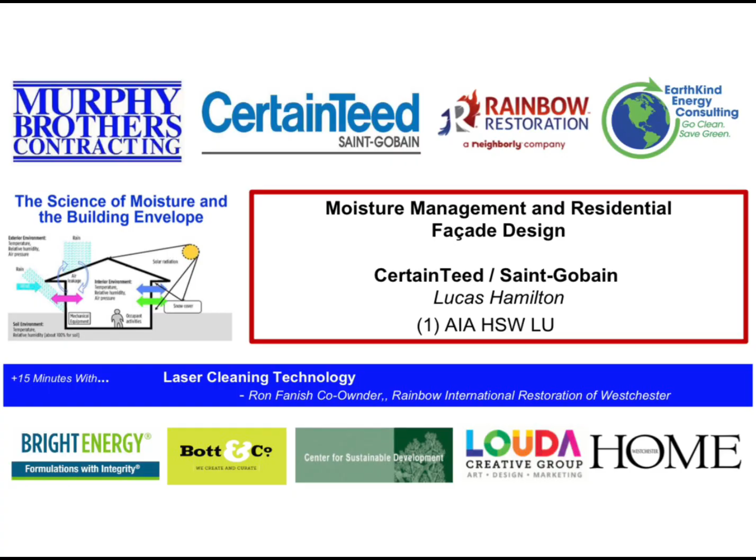Thank you, Michelle. Bringing up my presentation now. Okay, hopefully that all looks right and is in presentation mode. Doing good, great, then I'll go ahead and kick it off.

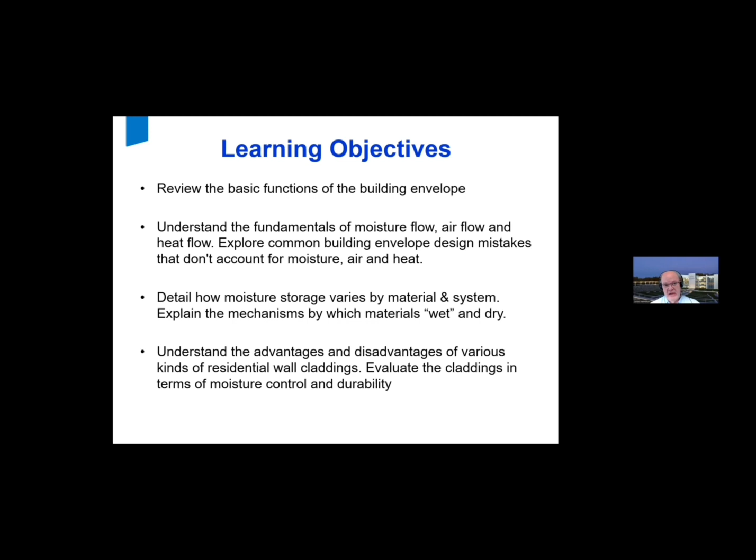So jumping right ahead, functions of the building envelope - I think you guys know this, right? It's structural; in most cases, the envelope is structural in residential construction. It is intended to protect us and be the envelope between the interior and the exterior, creating that interior environment in which people can thrive.

If energy was free, that would be really easy, right? Back when energy was cheap, we didn't have nearly as many problems. We also had like 3 or 4 layers to our walls, and now that energy is expensive, we've got like 6, 7, 8 layers to our walls, and we find ourselves in a durability pickle. So we're going to talk about how to get that durability back in, because that is one of the goals - it's a function of our envelope.

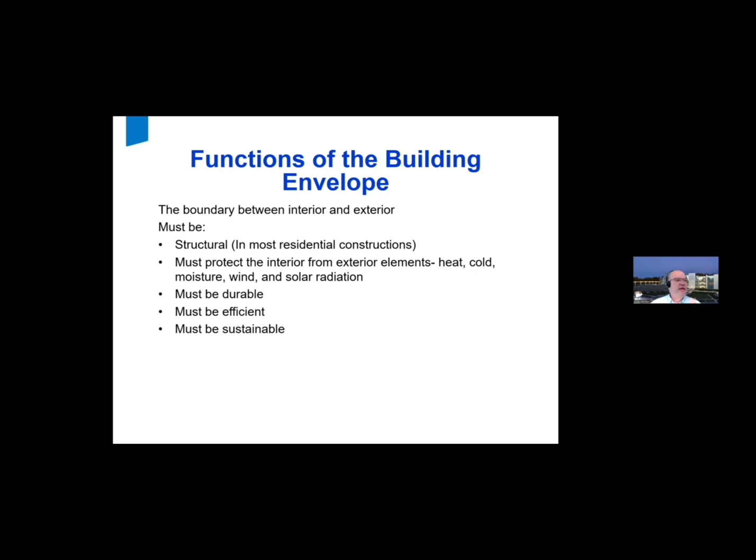Now the pressure is on us to be efficient and sustainable. We can do all of this at once. It is possible, all the tools and information are before us. But ironically, it takes going back and remembering the lessons of our forefathers, the giants on whose shoulders we stand with regards to building buildings. They did things that were really smart that we've gotten away from. We have to remember why they worked and bring that back into what we're doing.

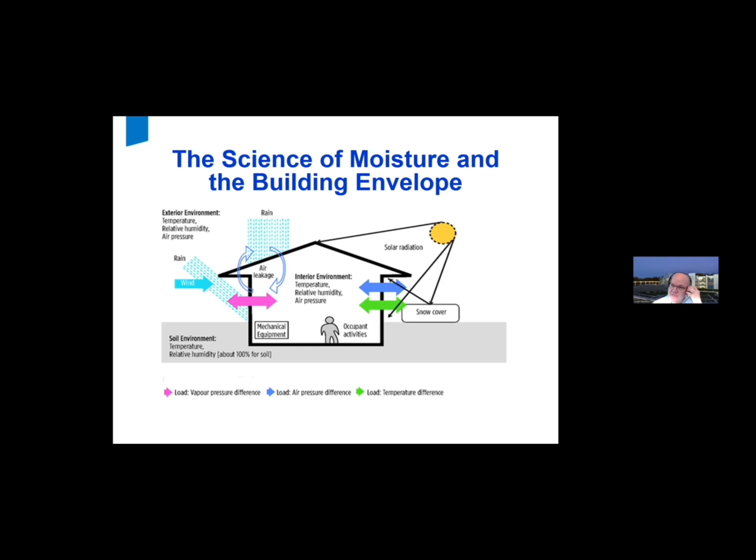So we've got water coming in and we're going to have to get it back out. We have to take advantage of the forces at our disposal to move that moisture, and essentially these are the forces that we do get. That little yellow orb in the top right corner is our friend, and we are going to try to use it along with the wind to our maximum advantage here, because the forces from nature don't have to necessarily be our enemy in this regard. They can actually be our friend and help us get back into a dry place.

For the most part, our weather, traditionally, has been influenced by the position of the jet stream and by ocean water temperatures. Those gave us the El Niños and La Niñas, and of course the actual jet stream was giving us your polar vortexes and the actual positioning of where the weather fronts were, when we had Canada's cold weather and when we got the Gulf of Mexico's wet weather. So that's what, for the most part, has been driving the weather across the United States.

And now we include global warming and the impacts we're currently measuring on everything from temperatures to rain depositions, individual storms. I guess you guys have all noticed that the 1,000-year storm tends to happen every year now. So we're quickly coming to realize that things like the plumbing code, and other things that we're basing our calculations on for how to handle moisture, might need to be either looked at, changed, or we immediately start putting in a bigger fudge factor or safety factor in our calculations to accommodate more rain coming in shorter periods of time.

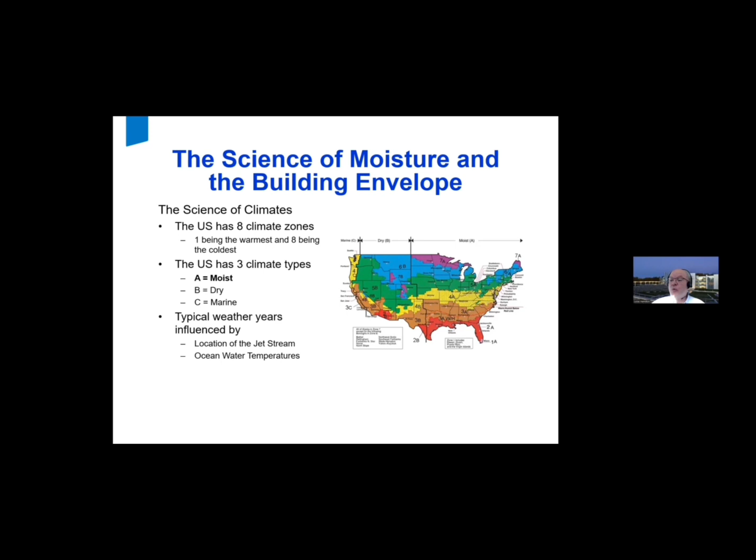And that's going to influence how we get the water off the building, which is all, of course, found in a plumbing code. And that is a really important goal: get the water off the building, because the longer the water sticks around in contact with the building, it's going to get in. It's going to get in. When water sticks to stuff, which it does, it finds its way in. We'll talk about how that occurs, but the trick is to get it off.

So, let's reset ourselves with the way we think about the weather and start to come to grips with the fact that some of these rainfalls are going to be a lot bigger than they have been in the past, and we're going to have to deal with that moisture.

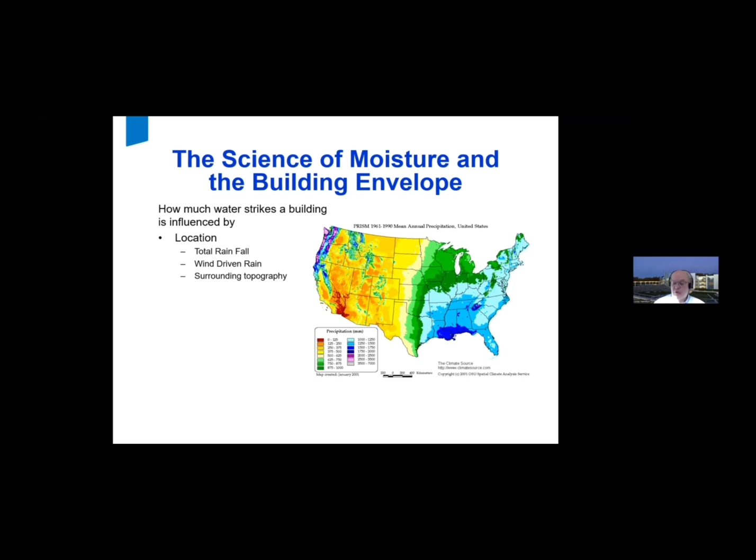Now, how much moisture gets deposited on your building, because the rain doesn't fall necessarily straight down. Usually there's a component of wind involved, so we have rain traveling at an angle, and the wind-driven rain deposits water on the side of the building as well as on the roof.

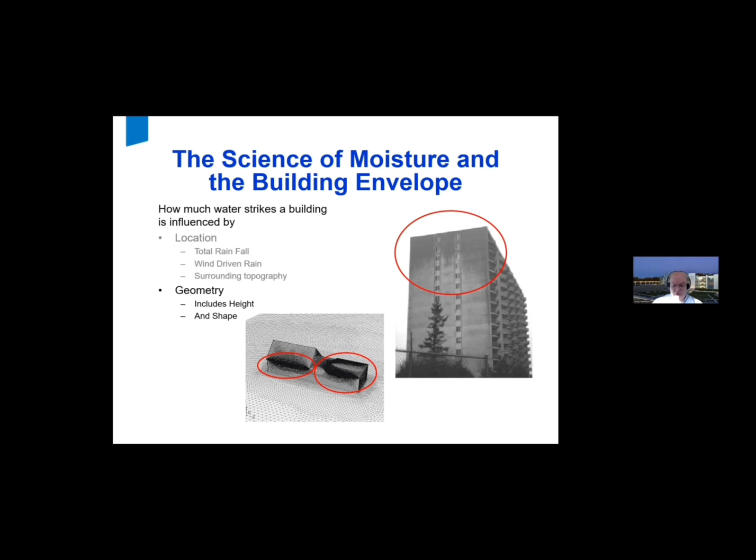Where are you getting rid of it? Again, the longer that moisture sticks around in contact with the building, the greater the chances it's going to get in.

By the way, you can find the wind-driven rain direction for any zip code in the United States from free weather generators available online. One of my favorite places to look for free tools is Oak Ridge National Laboratory's website, ornl.gov. At that site you'll find free weather rosette generators showing wind-driven rain, wind-driven snow, principal rain direction, any kind of weather you're looking for, for any zip code in America.

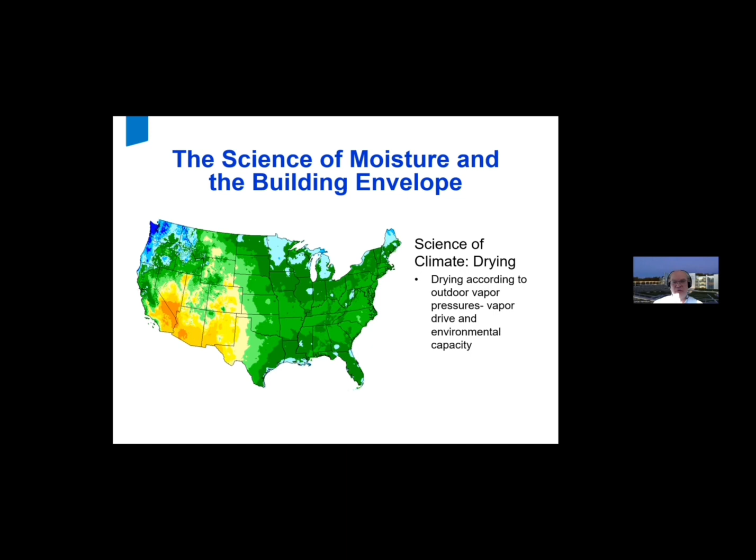We're going to talk a little bit about that coming up. Again, when we talk about the science of drying, we're talking about sun and energy from the sun. Here's a map of incident global solar radiation on the US. It is scary that parts of Western New York are as bad as the Pacific Northwest when it comes to the amount of energy you're going to get from the sun.

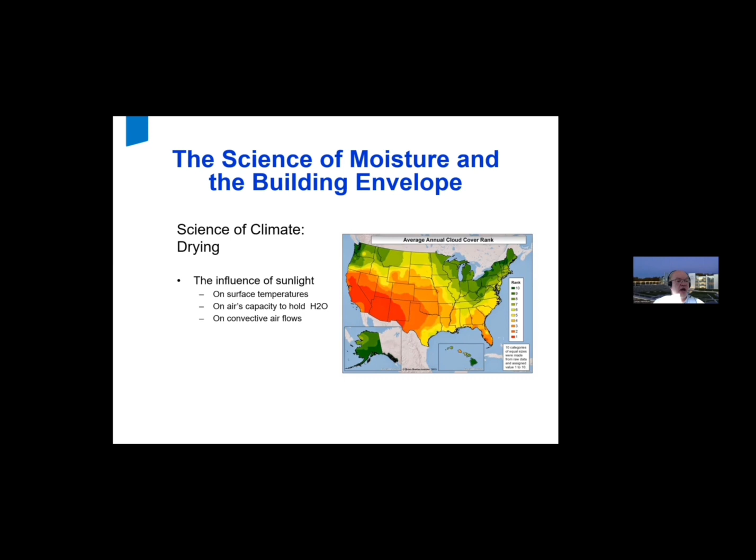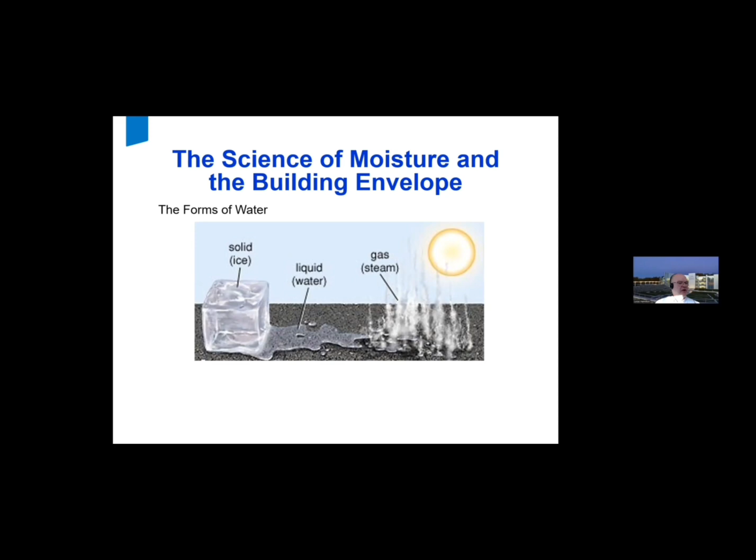Now, we're talking about trying to dry to the outside. So what we need is air that's below 100% RH. Clearly, if it's at 20% RH, it's got more capacity than 100% RH. Why is that? It's this whole concept of dew point that you've been lectured about since you were in design school—the idea that the air, as it warms up, can hold more moisture.

The dew point is the temperature at which, if the air cools off one more degree, it's going to have to give up its moisture. It can't hold any more. We're going the other way, going anti-dew point, bringing in lower humidity so we have a greater capacity to take this moisture with us. All we need is a few degrees difference and a little relative humidity difference, and we can take that moisture with us. The more, the better, the faster it's going to happen.

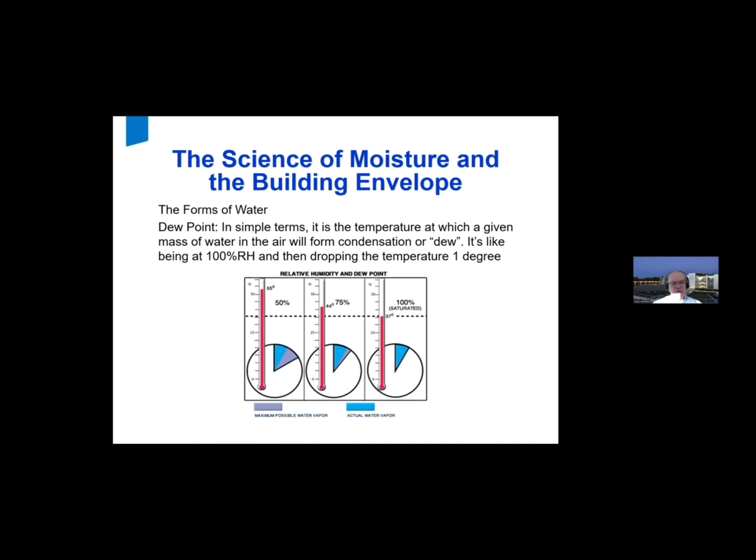But don't get turned off thinking that in Westchester, southeastern New York, Connecticut, New Jersey, or northeastern Pennsylvania that it doesn't work. It absolutely does work. It works in every single climate.

Now, the thing about water: water flows downhill, right? The Romans knew this, we know this. The problem is it's really sticky stuff. If it's in contact with something, it's going to want to flow into any crevice, any void, any capillary it can find to get back to that surface. It doesn't have to flow downhill when it gets to that crack — it can flow back a flat route, it can actually flow uphill, through surface tension and through airflow.

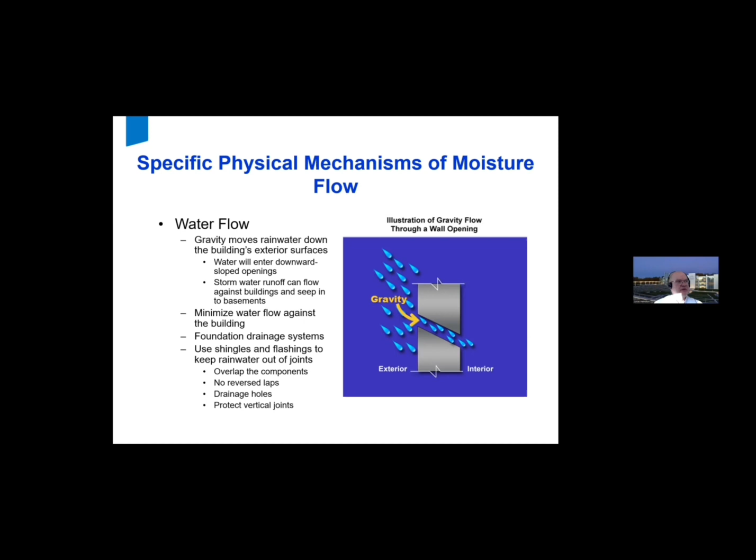You've all seen the water meniscus rise on the side of a piece of glass, your drinking glass — that's the surface tension of water walking it up the side against gravity. So the water is going to try to walk itself back into that building. The whole trick is to get it down and off the building as fast as possible. Try not to have voids, try not to reverse-lap stuff, try to give it a way out so it doesn't try to find its own way in. It will take the path of least resistance — just give it one, and it will typically go that way.

Now, when air flows, moisture does flow with it, because moisture is in that air. That's the whole magic — you're just dealing with moisture in the air, and all of a sudden the air is coming around some surface that's too cool for it. It cools it off quickly enough that the air reaches its dew point, and cools just a little bit more, and then that cold surface starts to sweat. It's your glass of iced tea in the summertime. It's why things colder than the air around them tend to be wet, and things warmer than the air around them tend to be dry.

It's this whole concept of air having moisture in it. You don't want it flowing up against cold stuff, because at some temperatures it only takes a little bit of difference in humidity and bang, all of a sudden you're sweating. So you want to be careful about these airflows through your assemblies.

Airflow is a friend, right? That's why we blow air through our dryers when we're drying our clothing — we need that fresh air and lower humidity. We want the airflow coming through, because if the air just sits still, it's going to get saturated. Once it's saturated at 100% RH, it can't hold any more, so we've got to move it out before it gets saturated. That's why in our dryer we flush it back out — we bring in fresh air from the house, and that air has more capacity. But that's the danger and the benefit of airflow, depending on how you're using it.

Usually when we talk about airflow and the need for air barriers, this is the graphic you'll see probably a hundred times in your career, and no one will tell you where it came from. It actually came from a book called Building Science for a Cold Climate by Neil Hutcheon, NRC Canada, I think like the 1960s or 70s. It's such an old graphic, it's been around forever, but it captures this issue of how much moisture can flow and how careful we have to be in this regard.

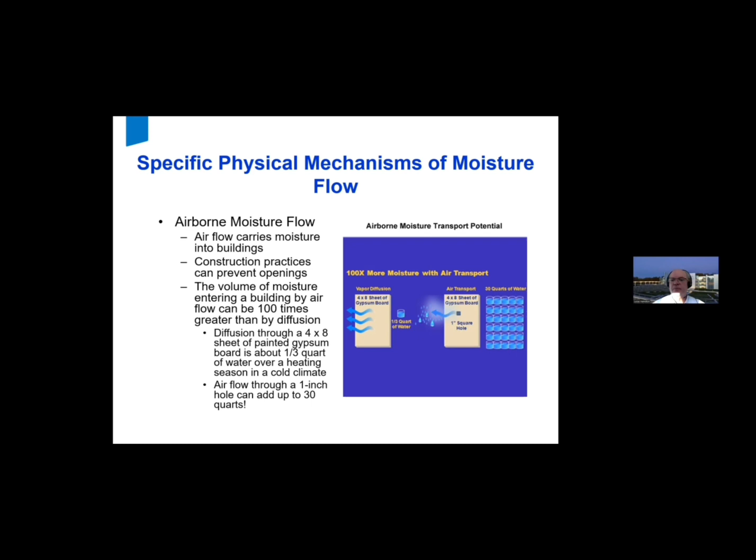Moisture also flows through capillary suction. I mentioned this already. If the moisture is flowing down that building and it gets to a capillary, it will get pulled back into that material.

Capillaries exist in things that grow, and in things that cure, not under heat and pressure. So we'll find capillaries in a lot of the building materials we use, especially exterior materials, unless they're synthetic or polymer siding. Most organic sidings have capillaries, so they love transporting stuff. Wood-based sheathings are full of capillaries too, and love transporting moisture. Gypsum has voids rather than capillaries, but it will travel in other ways.

This capillary motion is something you really have to be careful about. We usually break it with voids or gaps. It's the best thing to do, creating a drainage system behind a brick facade - very, very effective. The other way is to cast a hydrophobic layer in there, some material that will repel water, if you think you've got capillaries on either side. But the most common thing we do is try to create a break - something the water can't get across. For a brick cavity wall, we create that space between the brick and the next layer so water can't necessarily jump across it.

What's interesting is some research that Dr. John Straub did up at the University of Waterloo that showed how much actually blows across that cavity onto the next surface because of some of the voids that are in there. But that's maybe a discussion for another day.

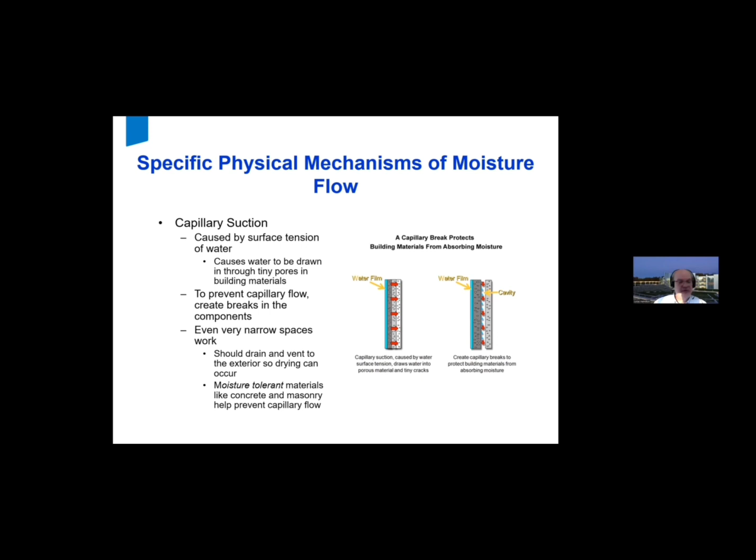So airflow is a reaction to pressure. It's going to find a place of lowest pressure - that's basically what nature does. The things that move are the stack effect, the flue or ventilation effect, the wind, or the system - there are examples for each one. I don't want to go into it too long, but we're going to take advantage of that wind effect. The fact that when the wind blows across our building, it creates both positive and negative pressures. It's the negative pressures that typically pull air out.

Nature abhors a vacuum. When you create a negative pressure, air is going to push its way in from somewhere else to fill that void. So if you create a negative pressure going across a roof at the ridge, you create a vacuum underneath that ridge, and the air is going to try to push its way up to that vacuum - that creates your whole roof ventilation scheme. The same thing happens when air blows around the corner of your building. That's why we create compartmentalized rain screens on really big commercial jobs, because going around the corner can get really funky having positive and negative pressure so close. So we try to compartmentalize them to avoid that occurring inside the actual rain screen.

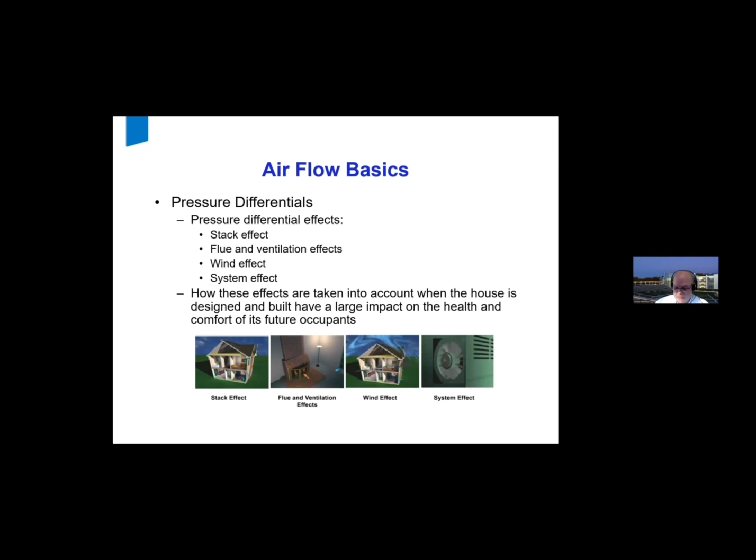But that wind effect is really, really powerful. That's the effect that lifts a jet plane off the ground - you can't deny that force. It's extremely effective, and it's free. So we're going to take advantage of that in our attempts to put some forces to play to help us dry out our buildings.

The thing with this airflow, as I pointed out before, is that if it flows up against a cold surface, we see all kinds of trouble. Here's a chart that shows the dew point at different temperatures and humidities. What we see is that if we take air at 75 degrees on the left-hand y-axis at 35% humidity, on the top x-axis, that means it's going to condense at 45 degrees. So that's the concept of dew point.

The thing where it becomes really tricky is going back that x-axis closer and closer to the y-axis and seeing how close those temperatures get to the actual air temperature. As you start getting to 90 and 95% relative humidity, you can't take a drop in temperature - you are going to sweat if you do. That really is the big danger about dew points that people are always warning us to stay away from - it's really, really tricky.

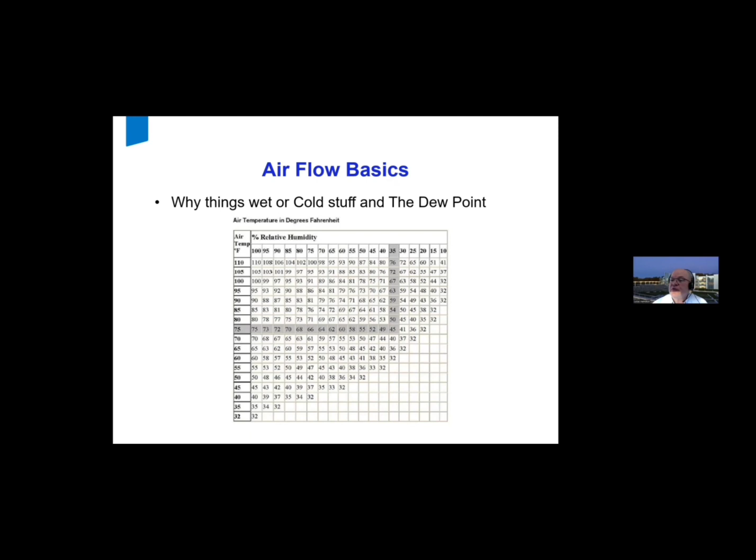We try to prevent these vapor pressures from ever getting so close. Now, when things do get wet, how they dry is really interesting. The concept of evaporation airflow does help us quite a bit. Evaporation is driven by a bunch of different parameters: the surface area exposed, the surface temperature - because the closer you are to the excitement temperature, the less energy it's going to take to get that water off of there.

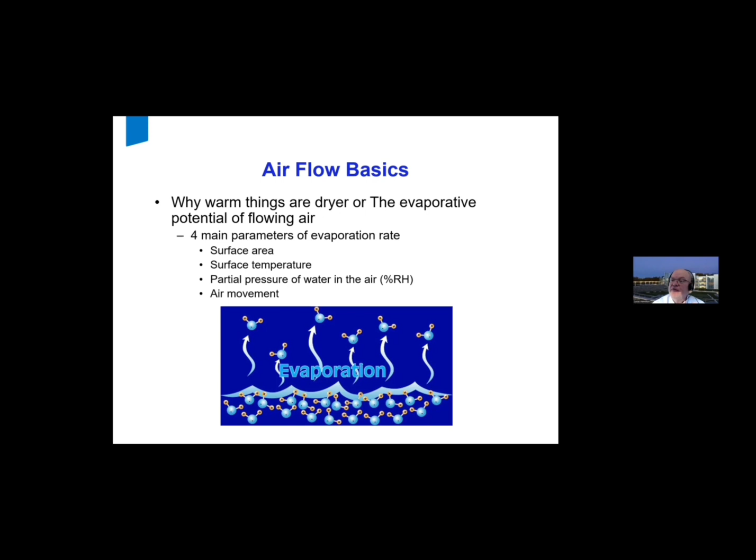The colder the temperature, the more energy it's going to take to get that excitement to break free. Air movement does give us some energy for this excitement, but the biggest thing about air movement is, remember what happens when your towel gets saturated, all the drying stops. The air movement brings us a fresh towel, and even if it's a little wet, that's okay, because it's still got some drying capacity. As long as the air movement keeps occurring, we keep getting fresh towel, we keep getting drying capacity. That's why air movement is so important to us.

Heat flow is one of our final things we're going to talk about in terms of these forces. It typically flows through conduction, convection, or radiation. Conduction is materials in contact. We don't get too much of that in this example because R value works against you. R value is resistance to conduction. So when we slapped all this R value into buildings, that's how to get rid of the energy force. That's all of a sudden why we started getting wet and staying wet.

Convection is the motion of a fluid or a gas. Just like it is for drying, it's the same thing for energy. By bringing you a fresh source, either hotter or colder than the original surface, it will help keep transferring that energy. The final one is radiation.

This is what we're going to take advantage of in our examples today. We're taking advantage of the radiation of the sun. It's extremely powerful. It is energy passed between bodies of mass at different temperatures, and it goes right across the vacuum of space. You've hated it when you're wearing a black t-shirt on a hot sunny day, and you've learned to put on a white t-shirt for that reason.

But what we're going to do is take that energy that occurred to you when you were wearing that t-shirt, and we're going to make that energy run a dryer for us. It's our best friend. Not only are we helping to dry our building out, we're managing the energy flows. We're warming up our surfaces. Guess what? In the wintertime, when your outer wall gets really warm and your inner home is really close to that same temperature, energy flow about stops across the assembly.

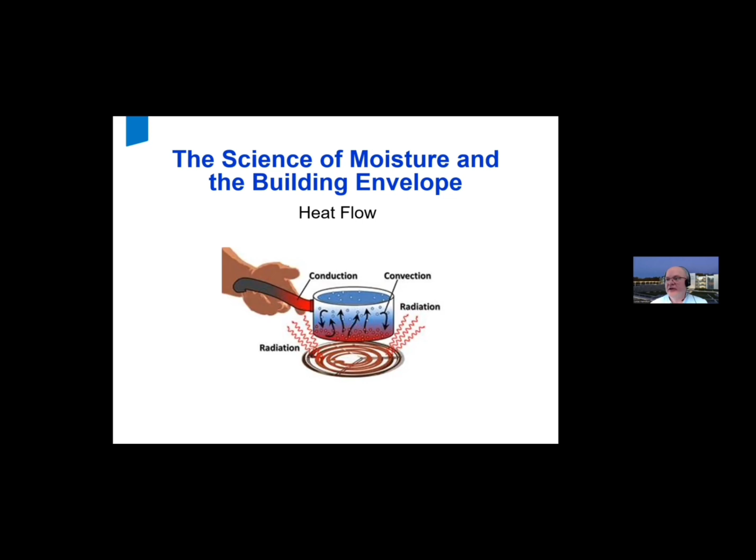The idea I touched on initially, you may have seen in the flyer that went out, is that all materials have this idea of moisture storage. Stuff gets wet. Things have always gotten wet. Some stuff gets wet and doesn't mind at all. Everything else, though, has some kind of limit you've typically got to stay within. Now, these are the safe moisture storage limits for a lot of common materials that we use in our buildings, in the framing, in the insulation, or on the exterior. We have some interior gypsum board mentioned there at the bottom.

The concept that any one of these materials can get wet is absolutely true. How long they can stay wet is kind of a separate conversation. You will get above certain moisture limits, you're going to get swelling that occurs. You get capillary saturation, you get cellular saturation. You can get biological growth, contamination, mold, and mildew when water becomes available at surfaces because of any of this. So there are some limits below these safe moisture storages that you're going to want to stay below for biological contamination reasons. These are really up there, what something can live with regards to how much it is going to absolutely absorb.

You'll see fiberglass down there, it says 0. Fiberglass won't absorb any moisture. It will adsorb moisture, and let's not get confused between adsorb and absorb. You probably promised yourself you'd never need to know the difference. No, adsorb is on the surface. Glass adsorbs water.

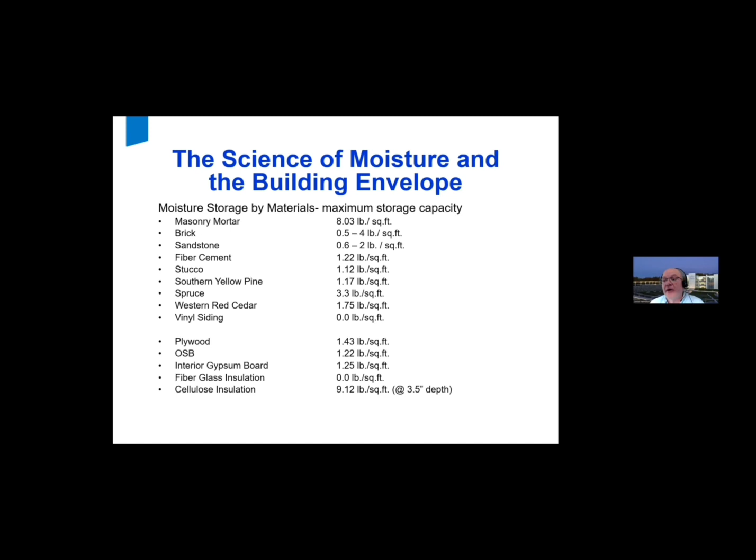So again, these are just the safe moisture storage limits with regards to stuff not swelling, falling apart, or getting fungus on it. Fungus is a higher level of moisture which will actually consume the substrate and cause structural damage. Mold doesn't cause structural damage—fungus does, and fungus occurs at a higher moisture limit. But all these limits I'm showing represent how much a material will actually absorb. There's some level below here you need to stay.

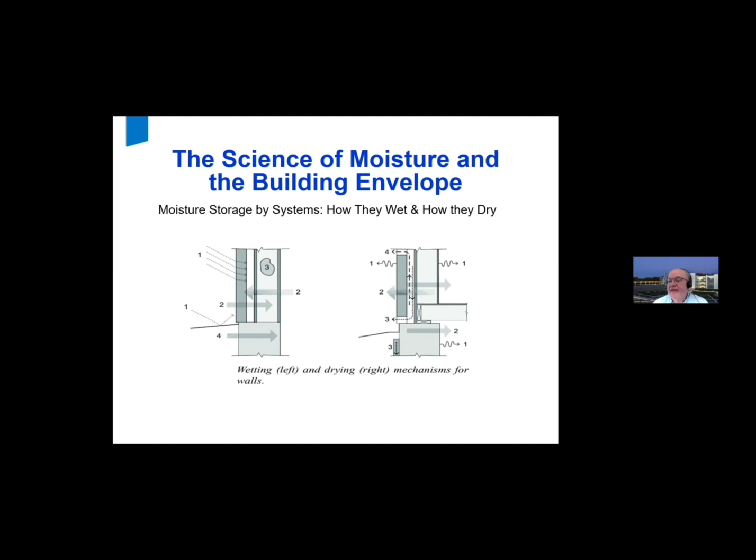On the right are the forces that dry us out. Number one is evaporation off the surface, number two is diffusion, number three is gravity, and number four—the one I really want us to focus on today—is airflow combined with evaporation. This is what we want to try to bring back into our buildings everywhere we possibly can, because it does amazing things for us when we can do that.

When we do that, we can take all of those moisture sources and stay below that safe moisture storage capacity for the entire assembly. Because what we're doing is making that bottom right spigot bigger than it ever was before, and it opens up every time the sun comes out and every time the wind blows.

There are very few assemblies in which this actually hurts us—in most assemblies, it helps us. Computer modeling will confirm one or the other, but I'm going to show you some examples of how it actually works and how it actually does help us.

Now, one of the things that's really important in this discussion is the draining and ventilation rate—how much airflow are we talking about? I can tell you your home dryer runs at 200 to 300 cubic feet per minute. We're not going to do that; we don't have that great big fan motor running. We only have the sun and the wind, but we can get pretty close.

The question becomes, what is that number? How do we find it? There's really amazing computer modeling and simulation tools out there. I use a program called WUFI, W-U-F-I. It's free software you can download from the U.S. government, from Oak Ridge National Laboratory.

It allows you to actually put ventilation rates behind claddings. You can put leaks inside walls, and you can put ventilation rates inside claddings too. You can do all kinds of really cool stuff.

What is really dangerous, and you should never do, is using it unless you actually know what the ventilation rate is. You're playing with fire if you're just throwing numbers in there without knowing what they really do—it's like any simulation software, an error this big going in is that big coming out. So you really want to know what those numbers are before you start introducing them into a calculation.

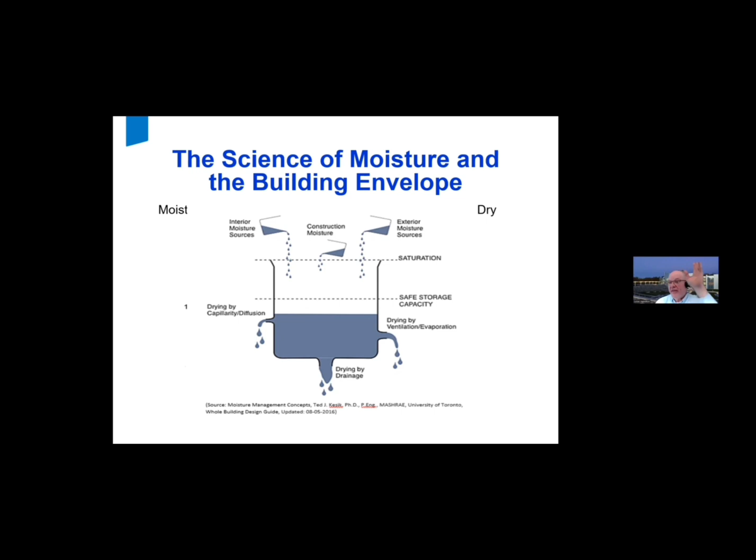Air change per hour in the construction and the design. What they found was, and I'm going to just be using North American examples here, and these measurements were made in North America: in red brick walls, if we just weep the wall, right? If we do everything else right, if we put up an air resistant, water resistant barrier on the other side of that cavity that's completely airtight, and we just put a weep at the bottom of the wall, and we put that weep about every 3 meters, that's pretty far.

What we're getting is around 1 ACH per hour, one air change per hour. That's all you're really going to get in that cavity if you actually weep that wall and the weep is open, right? That means you guaranteed it was open. If you chose a material other than a weep tube that you had a better chance of staying open...

Like a product that was like a corrugated vent that you might see poked vertically in between two bricks for a drainage medium, and I don't want to mention any product names, but those corrugated continuous pieces that are going to be a whole brick height are a lot more open and will get you as much as 10 air changes per hour. And that's pretty good, but that's a really big difference.

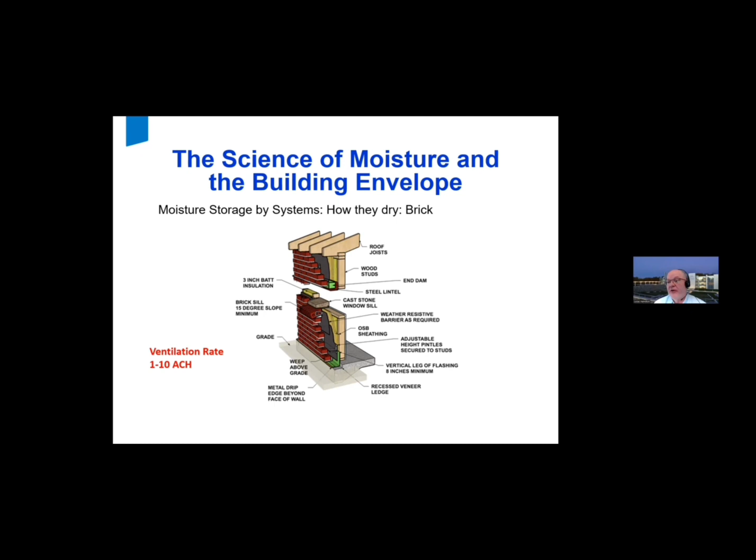What they measure on sidings is really, really interesting. This is great news for our siding applications, and one of the reasons they are so durable. There's a lot of ways you can do them. You can have things like vinyl sidings that are loose nailed and inherently ventilated because they are loose nailed and they have drainage holes within them. You can take lap sidings and install them over furring strips or over other materials that will guarantee a clear airspace for drainage and ventilation.

If that clear airspace is now open at the bottom and the top, that's a big change over the brick wall. I didn't tell you, on the brick wall that brick wall was not open at the top, because we don't open brick walls at the top as a matter of habit. We tend to seal them off. Even in residential constructions, we tend to seal them off at the top of the wall. We put a fascia board down and we caulk below it, and that whole thing is just totally sealed off to the outside. It is not open to the inside.

And we're not allowed to vent that up into our soffit ventilation. That better not be venting up into our soffit and up into our attic ventilation. That's supposed to be compartmentalized off of there. So right now, that's just a big, dumb, dead thing at the top of the wall.

Now, these weren't 40-year-old walls that have been painted 20 times or even 10 times and sealed off. They weren't ones that the homeowner came back and caulked up and sealed off on us. These are walls that were left open by design, as they always were.

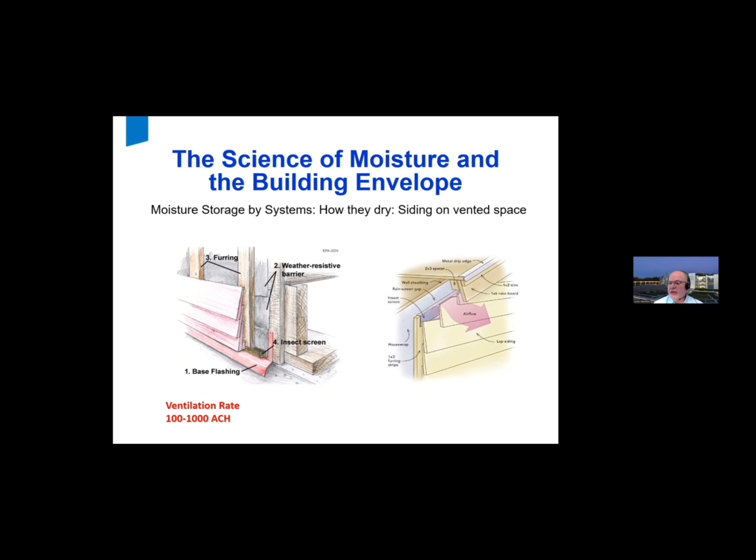The more you leave that cavity open, the bigger the impact. I'm about to drop the impact on you here for a brick wall in Albany. I ran the simulation yesterday. If I take a brick wall in Albany, this is a 2x6 wall.

Now, this wall built with no window leak, and may you always be that way, is not a problem. And you know that—you've built this wall in your own neighborhoods, and it hasn't been a problem for you. But if we got a window leak, or someone reverse-lapped our weather resistant barrier, or something happened over time, all of a sudden water got back there. This is kind of the difference between these two models.

In these two models, it's assuming I've got a 1% wind-driven rain window leak. It probably could happen at some point when caulking isn't maintained or something else. I'm letting that water drop down onto the top of my sheathing in that saddle of the rough opening. I'm letting the front of that get wet to see what happens.

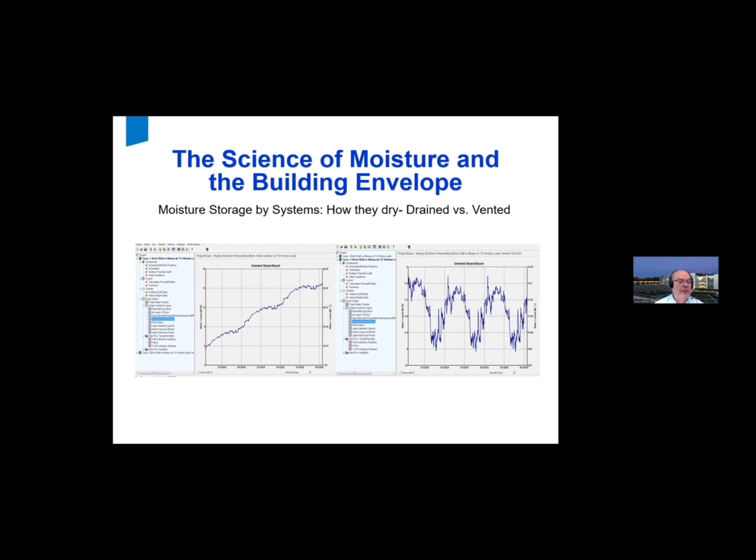So what have we learned? I know I'm going fast, but I know you guys are on a schedule and I'm going to get you there. We've covered a lot of stuff.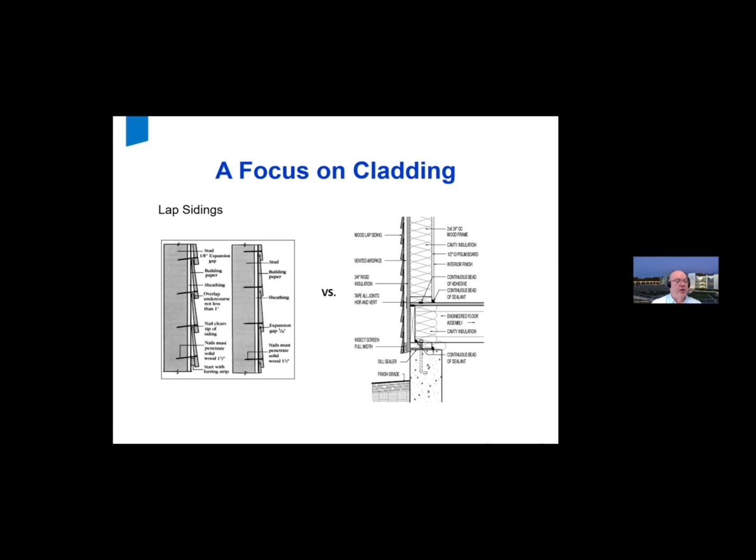We don't let it vent up into that soffit. That is not allowed. We do not put extra moisture. That's like venting our bathroom or our dryer up into the attic. Please, please don't do that. You're not allowed to do that.

The designs, the calculations we have for roof ventilation are really tenuous today to begin with because of how much insulation we're putting in our homes. It was a lot safer with less insulation. Now with more insulation up there, the temperatures are much closer. We need all that ventilation. We can't take any more moisture up there. So don't vent it up that way, you can't handle it. Make sure you're venting it to the outside.

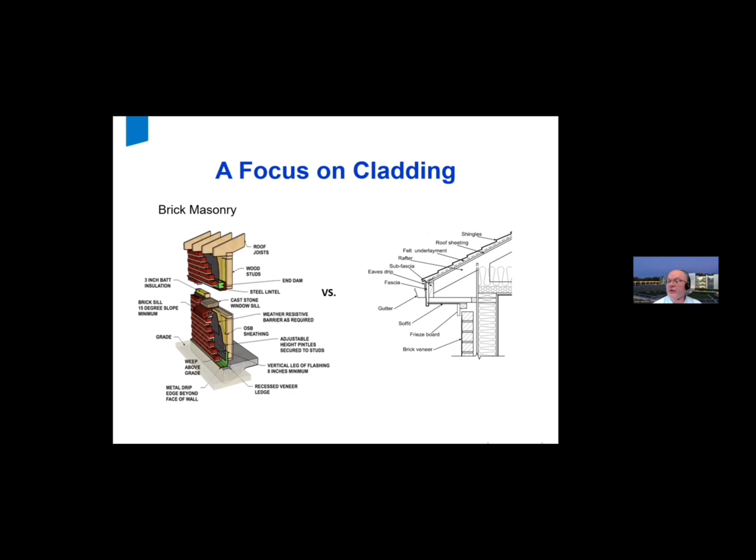And when you do this, make sure the homeowner knows, oh yeah, by the way, on this page right here in the homeowner's manual, you signed that you would not caulk that joint 10 years from now when you decide to paint that fascia board again. Don't caulk that joint. If in doubt, put something in there so they don't, like a bug screen or bird mesh or something else that makes it clear to them that this thing is meant to be right where it is.

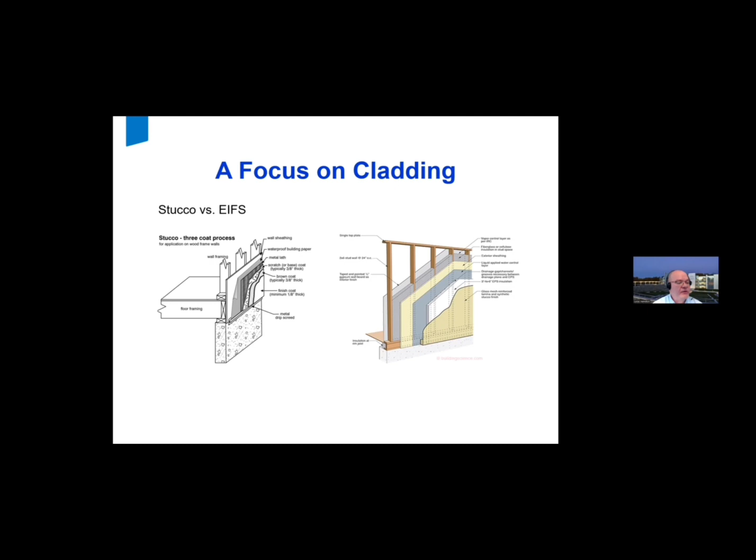When you look at your stucco and your EIFS, remember they can be installed like drainage systems, but it's a stucco system with the stones in front. So you don't really like to put those expansion joints or all the water managed things about stucco in this system, but pay attention, that is a stucco system. So you're at a pickle there.

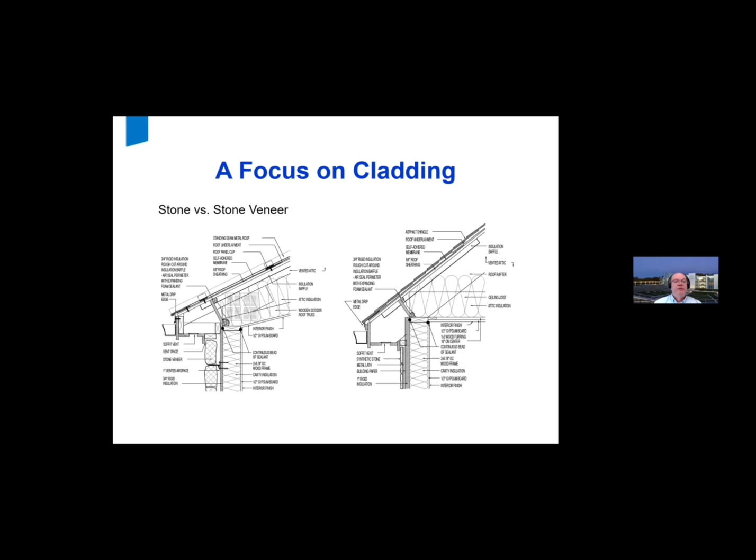So if you really have a client or an assembly where you really want that look, go for these new systems that have the stone hanging on a siding system. These can be installed as a water managed system. On the left is your synthetic stone system in the traditional application in stucco. On the right is a newer synthetic stone system that uses a metal grid pattern to hang itself on.

It hangs like normal siding. So here you're going to get that same stone look, but an actual water managed system that never gets caulked. You'd pretty much have to shove your sandwich back there to screw it up. It's a really, really bulletproof system.

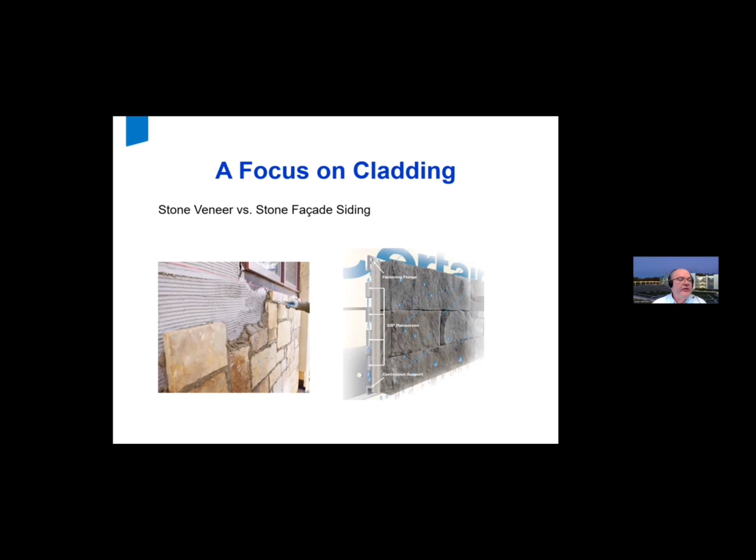There's a couple different manufacturers of these kinds of products out there. Look for ones that are going to hang in accordance with what you're doing and work with what you've got going on. When you do, you've got the water managed system you're looking for, with that look of stone. So no matter what residential cladding you're putting up, look for a way to do it as a water managed system. If you do, we can get all of these things.

So in summary, we've talked about trying to create this boundary, but the pickle we get into is that energy was our friend. Energy is what kept us dry, because we've never made a dry building in our lives. So we have to find a way to put energy back into the equation, get the free energy we're allowed to, which is the energy of the environment, and put it into our assemblies to run that dryer for us.

The sun is great and the wind is great, but just the wind will work. Just the north, the west—it does. The sun can be over on the east in the morning, and you can still run a dryer on the west and the north when the wind is blowing. So these things work for you almost year round.

It's a tremendous benefit, and it's the kind of thing we need to put back into our repertoire of solutions, because I'm afraid they're going to keep telling us we have to put more layers in this wall, which is not going to make things easier. But if we can dry from the point moisture gets to and put it back out again, and not let it get inwards, then we're just inherently in a better place.

That's how all of that works for us. That's why some systems are so much more durable and bulletproof than others, and some we just can't seem to get our own way with. It's all right here—this is some of the secrets.

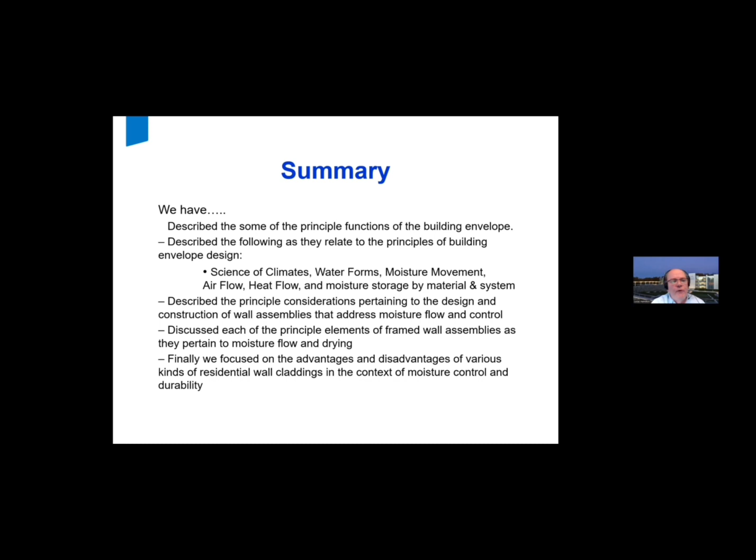I really urge you to take a look at this idea, and I'd be happy to share with you any of the outside research and places you want to go if you want to learn more about the computer modeling and where you can download more of that. Again, the software is free software you can download from Oak Ridge National Laboratory. But a lot of this research is from different universities and things around the world. It's really, really cool stuff, and it really works.

You'll see demonstration projects going on with this kind of stuff from Building America to everyone. It's why I mentioned that if you look out in Climate Zone 4C Marine, the Pacific Northwest, this has already shown up in their code language under ventilated cladding assemblies. It's letting you get rid of the vapor barrier in the Pacific Northwest, because it's saying, yeah, we know it's okay to get wet on your sheathing in the winter because it's too cold to grow mold. And by the time it gets warm enough to grow mold again, we're going to dry out so fast it won't have a chance to grow.

They've been doing that as experiments out there and showed it worked for them, which is why they put this language in the code and got it out there, because it gives them a little more design flexibility, ways to not be putting more materials into the wall if they don't need it, and ways to use the forces of nature rather than the forces of the fan or the furnace to keep us where we are safe and where we are dry.

So that was all I had.

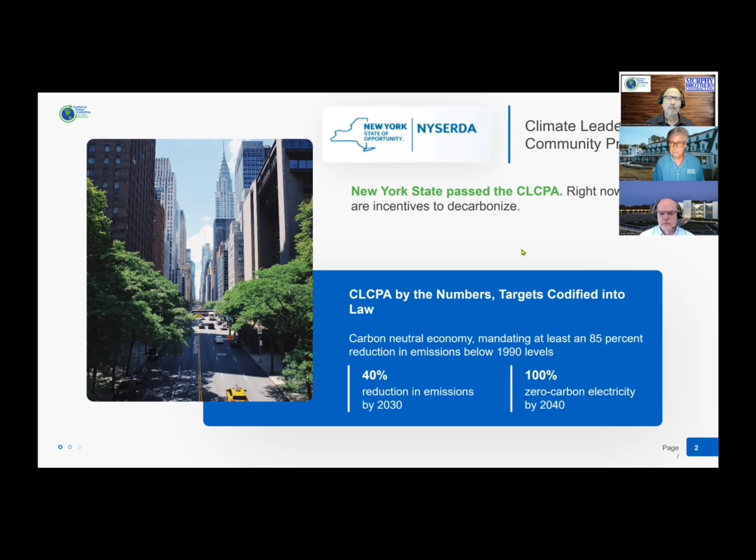As of today, there are hundreds of millions, actually billions of dollars worth of incentives to help organizations, government, nonprofits, and businesses make the transition to clean energy technologies for electricity, heating and cooling, and transportation with electric vehicles and charging stations. However, if we don't start doing it soon, we're going to get hit with penalties, and we're starting to see this built into the building codes. In New York City in 2024, those penalties are pretty aggressive - we've seen penalties of 50 cents a square foot for any space that has excess greenhouse gases, if you have more than 25,000 square feet.

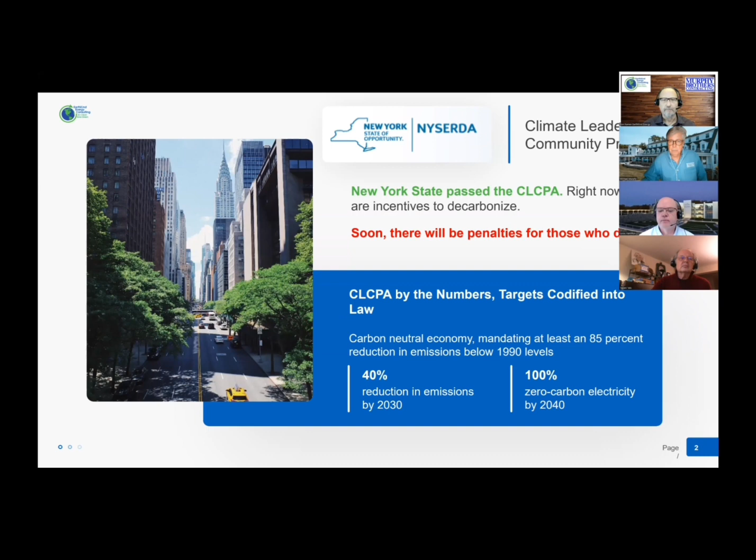Earthkind Energy works to represent businesses, government, and nonprofits in helping to identify technologies, providers, and financing, including accessing the incentives to make these transitions happen in a way that reduces your cost, gives you a tremendous return on investment, sometimes higher than 20% and more, or for certain entities, can even do it with no cash outlay. The project gets put in by someone else who owns it, maintains it, and then you just get the savings. So if you're interested in taking advantage of these billions of dollars worth of incentives for your electricity needs, your heating and cooling...

Basically, what these technologies do is reduce your operation and maintenance costs. We access and maximize the amount of utility, state, and federal incentives that you can get. And for those of you that work in nonprofits, a 30% federal tax credit for solar, geothermal, and other technologies that normally couldn't be accessed by government or nonprofits is now going to be available as a grant. So instead of a tax credit, you can achieve a grant for nonprofits and government entities. If you want to know more, give us a call. Again, zero cash outlay, outstanding return on investment, minimize greenhouse gases, and create a proud legacy for your family and all future generations.